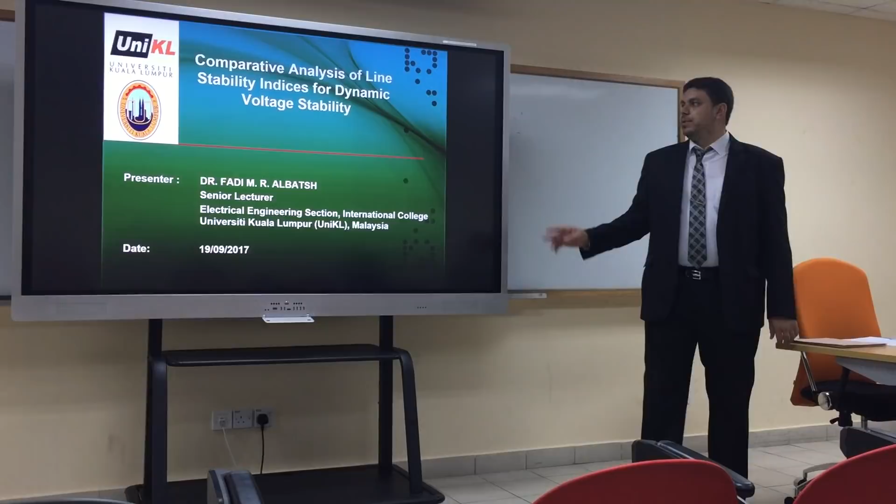Inshallah today I will present my paper titled Comparative Analysis of Line Stability Indexes for Dynamic Voltage Stability.

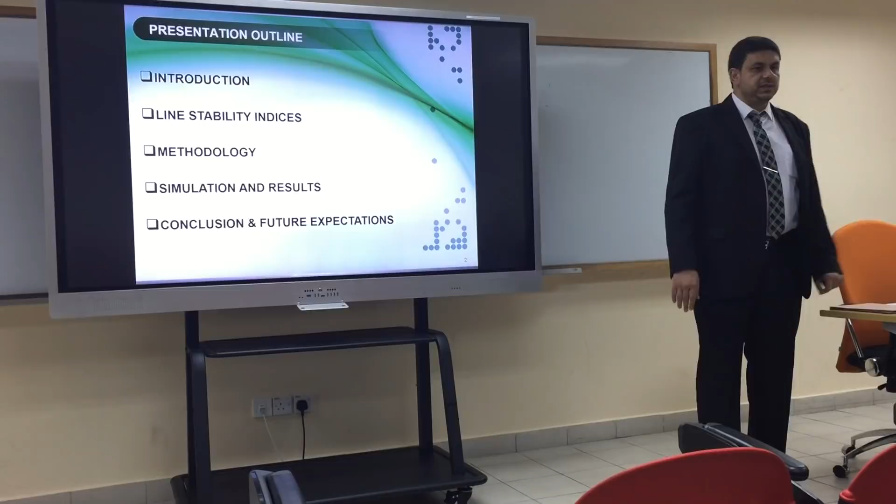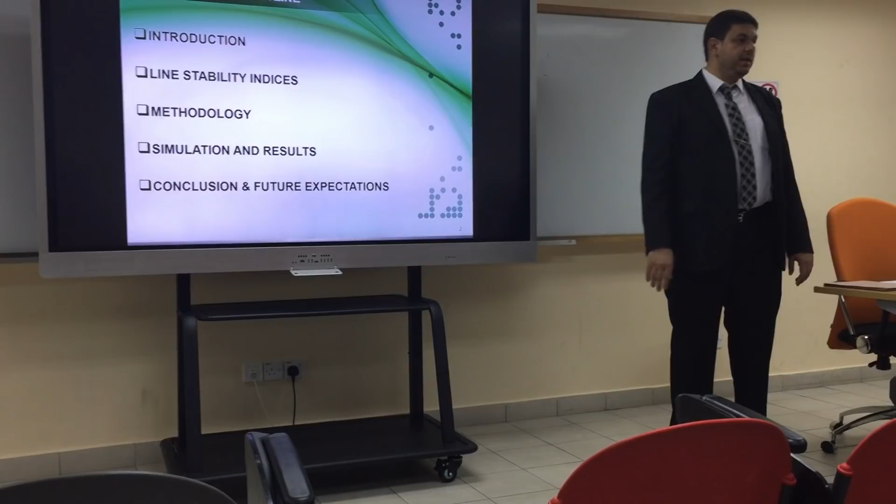The outline of my presentation: I will introduce first the problem of voltage instability, then introduce 4 line stability indexes, followed by the methodology used to analyze the voltage stability indexes based on dynamic analysis. Then I will show some simulation and results, and lastly conclusion and future works.

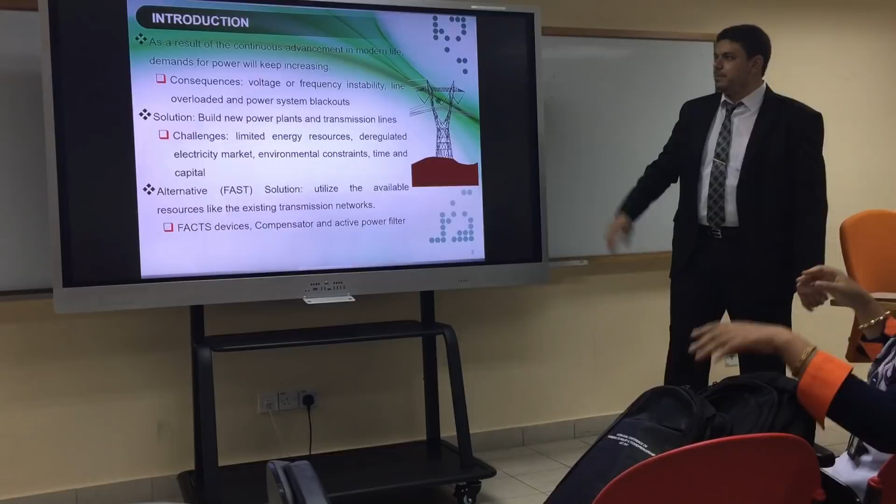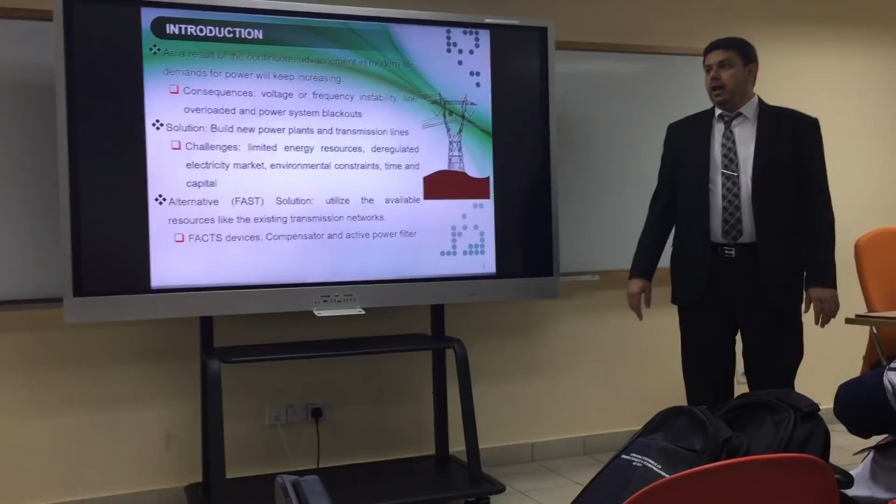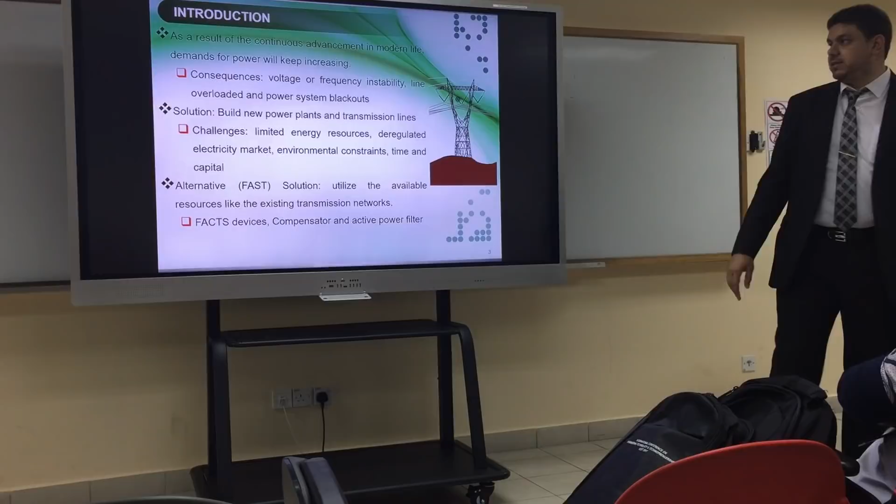As a result of the continuous advancement in our modern life, the power demand keeps increasing more and more. As a consequence of these increasing demands, power system networks suffer from different problems, such as voltage instability, frequency instability, line overload, and power system blackouts.

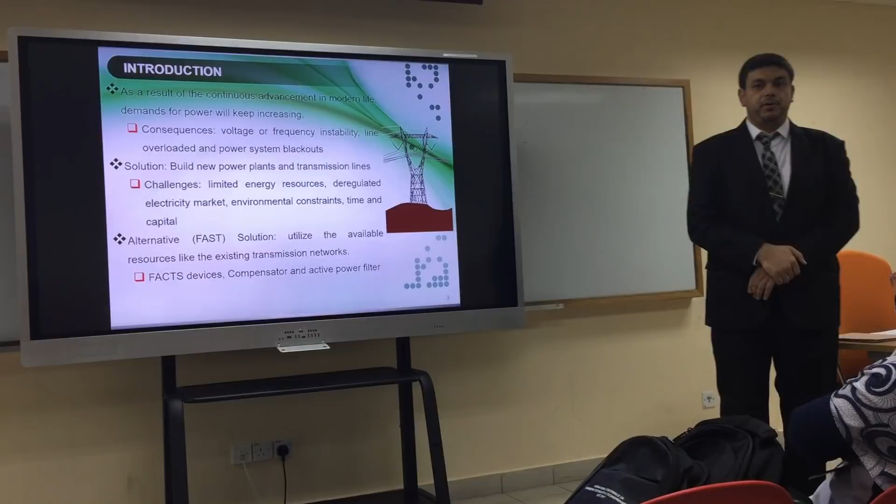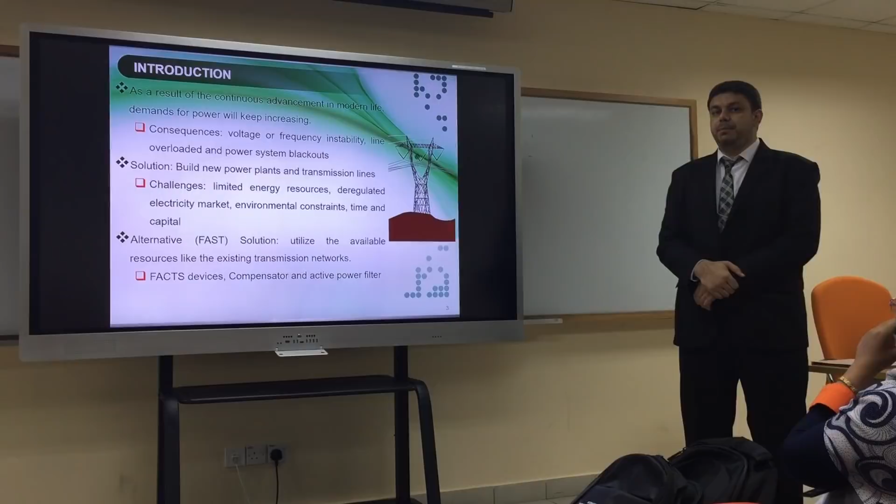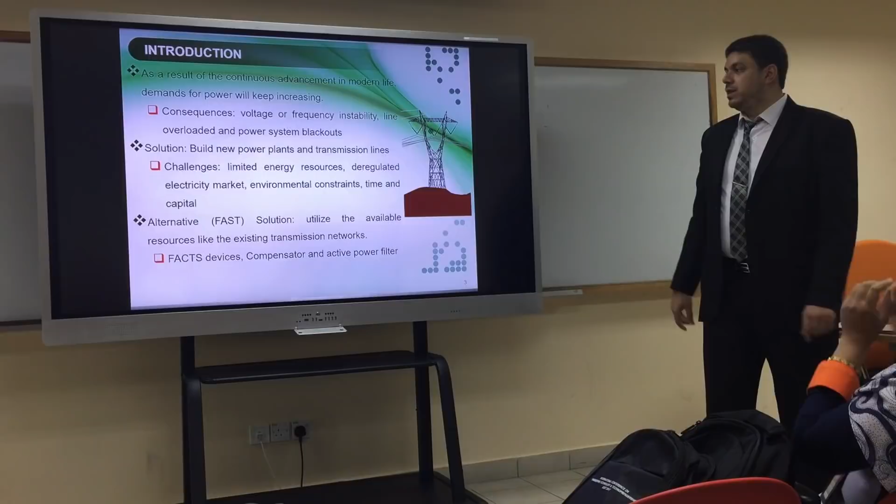To come out with a solution for these serious problems in the power system network, we actually have 2 solutions. The conventional solution is to build new power system plants and new transmission lines to supply the increasing electricity demands. However, this solution is very difficult to implement, because we have many challenges such as limited energy resources, deregulated electricity market, environmental constraints, and time and capital to implement such big projects.

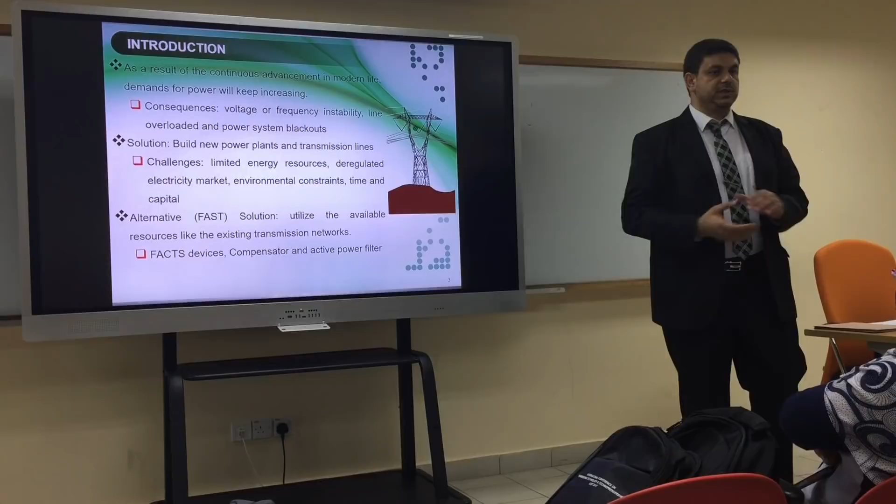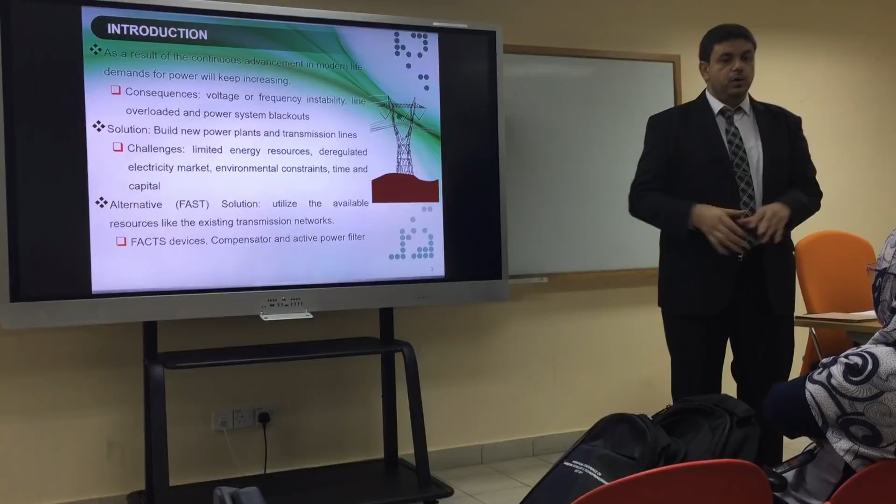The alternative solution is to enhance and improve the existing power system network by integrating some compensators or renewable energy resources with the existing network, to increase the capability of the current network and improve the power quality of the whole network.

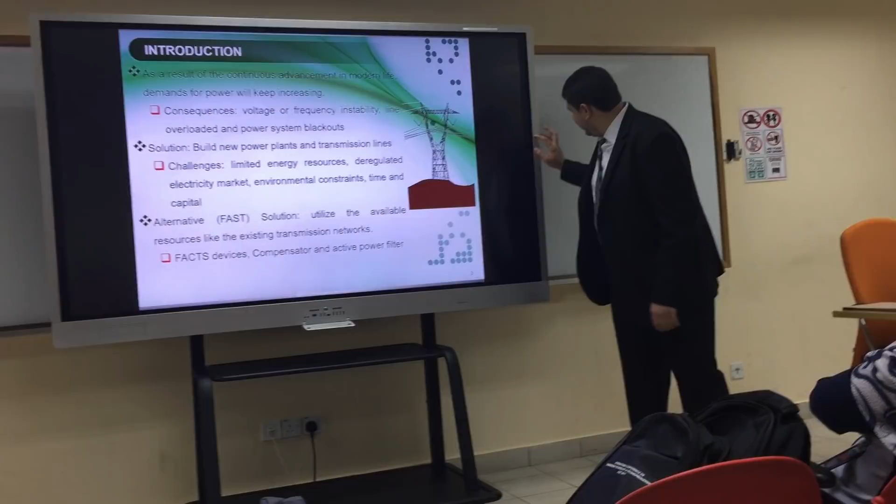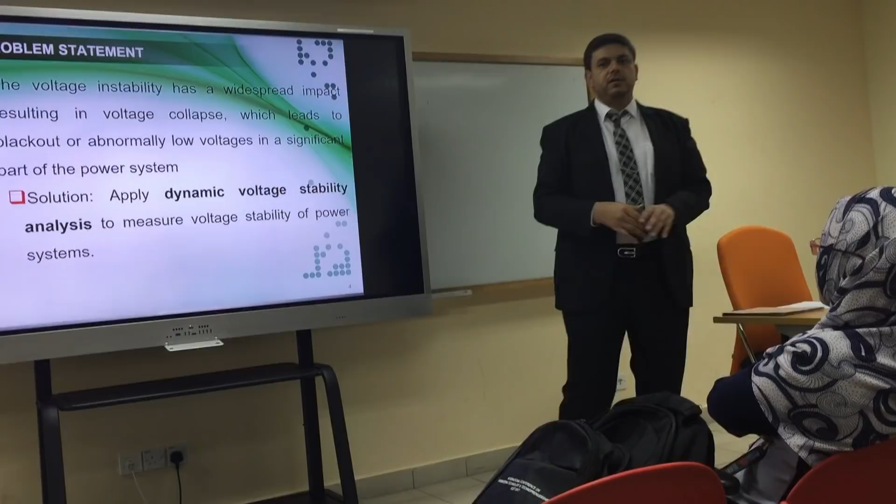To implement this solution, which I would call the intelligent solution, we actually have one problem: where should we support the current network? Let's say we have a large network, like for example a 118 bus large network, and we decide to use this solution and support this network. Now the critical question is, at which bus should I support this network? This is the main challenge we face.

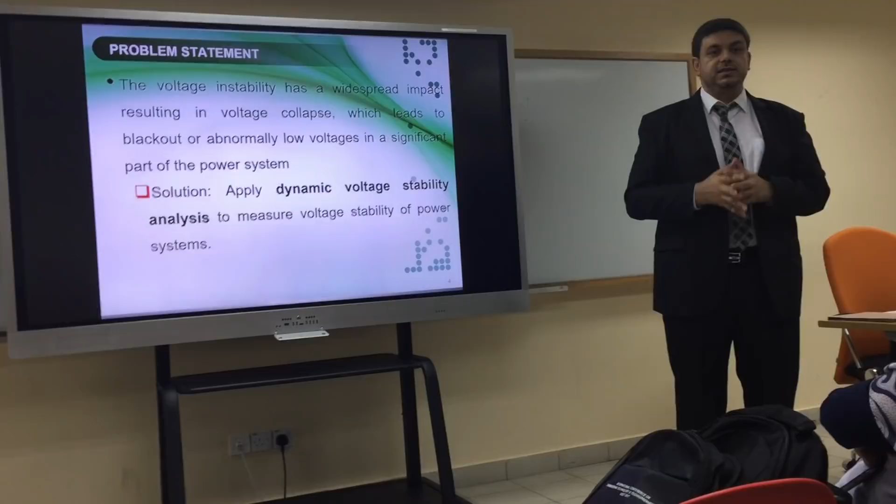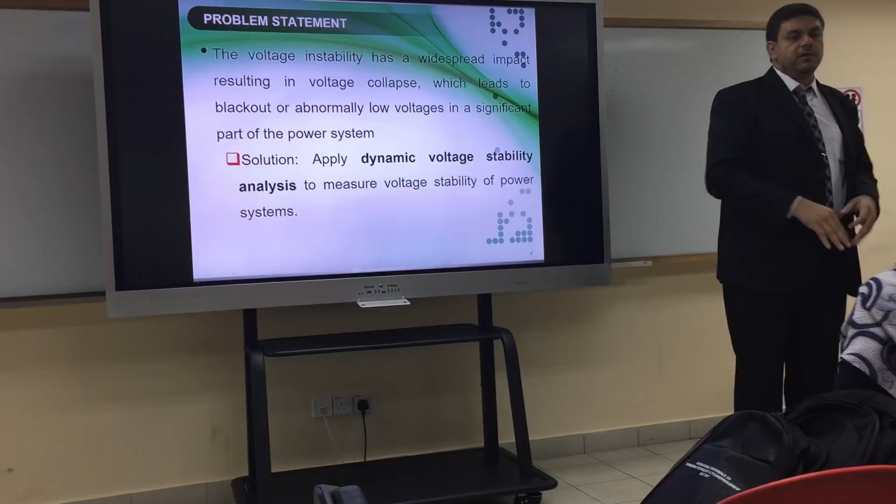The answer is, we're supposed to support the weakest buses in this large network. How can we find and determine the weakest buses? We have to use line stability indexes to do analysis for the whole network and find and determine the weakest buses along this large network. Then we can integrate our proposed solutions such as renewable energy, FACTS devices, compensation devices, active power filters, and so on.

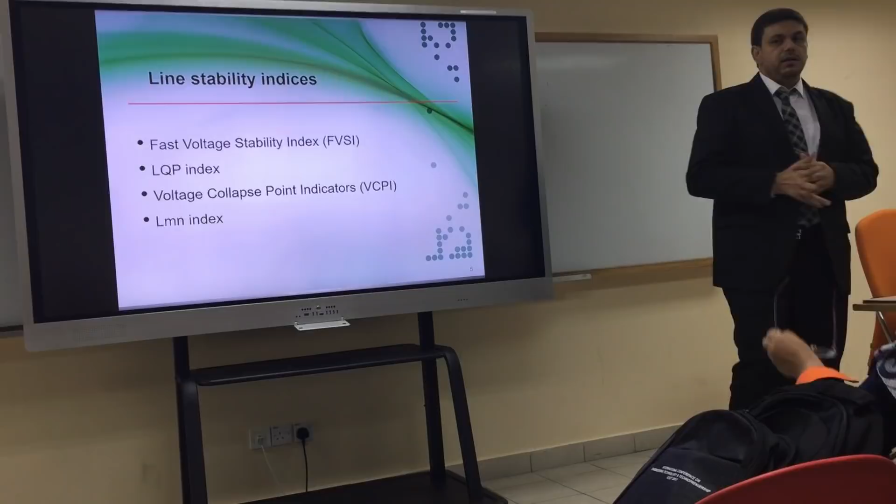Now I will introduce what line stability indexes are. Line stability indexes are used to do analysis for the whole network and find where the weakest buses are in terms of voltage instability.

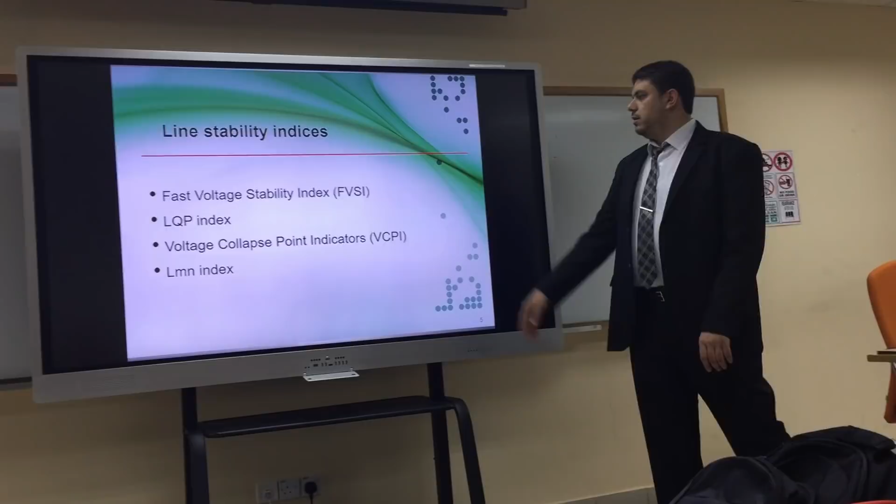We have different and many line stability indexes. In this paper, I have presented 4 of them: the well-known indexes, which are Fast Voltage Stability Index, LQP index, Voltage Collapse Point indicator, and the LMN index.

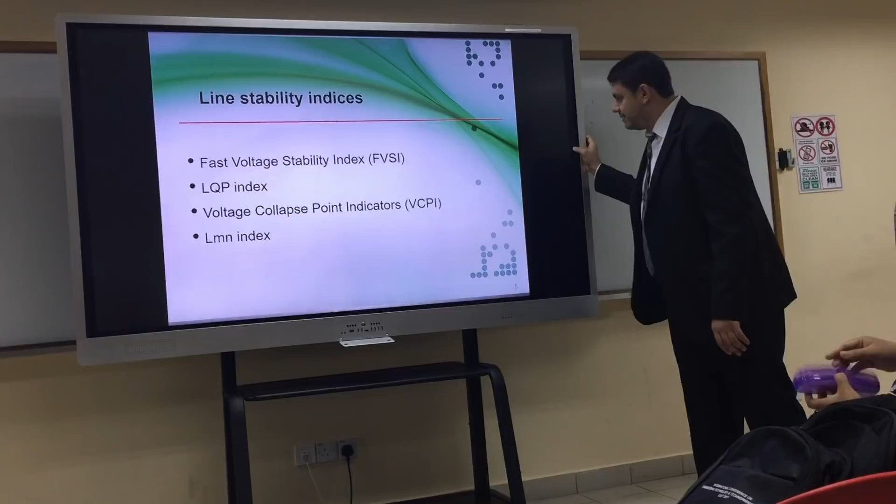So basically, how can we use those indexes? First, you have to build your network using dynamic simulation software, for example PSCAD or any other software. So you have to build the system.

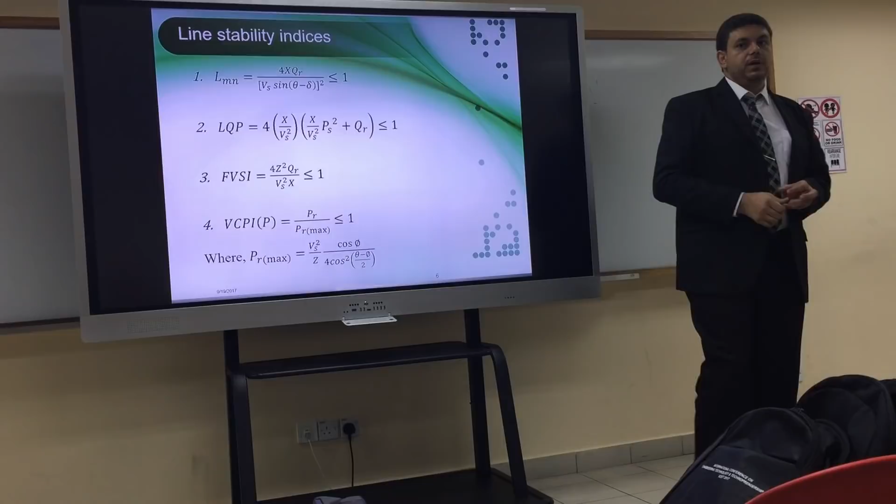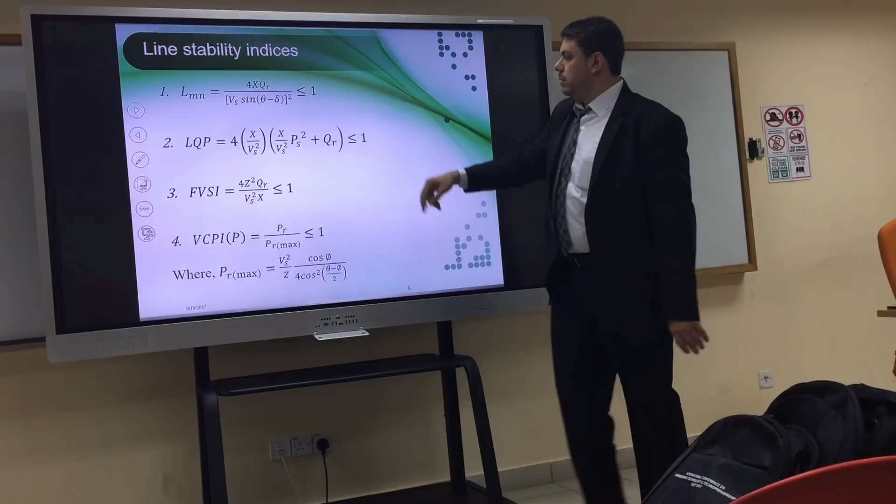Then analyze the whole network in terms of, at each bus, finding all the parameters such as VS, Q, P, theta, voltage, Z, and so on. This means we have to build the full network, and at each bus, measure and find all parameters of that bus.

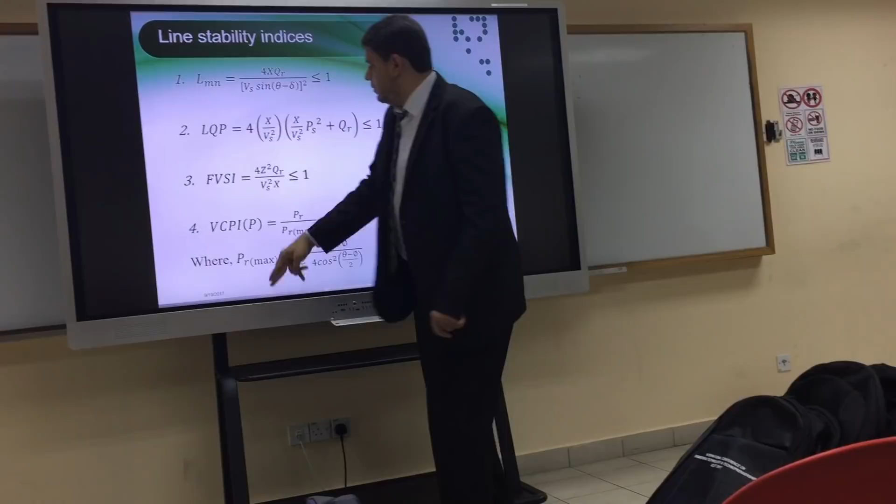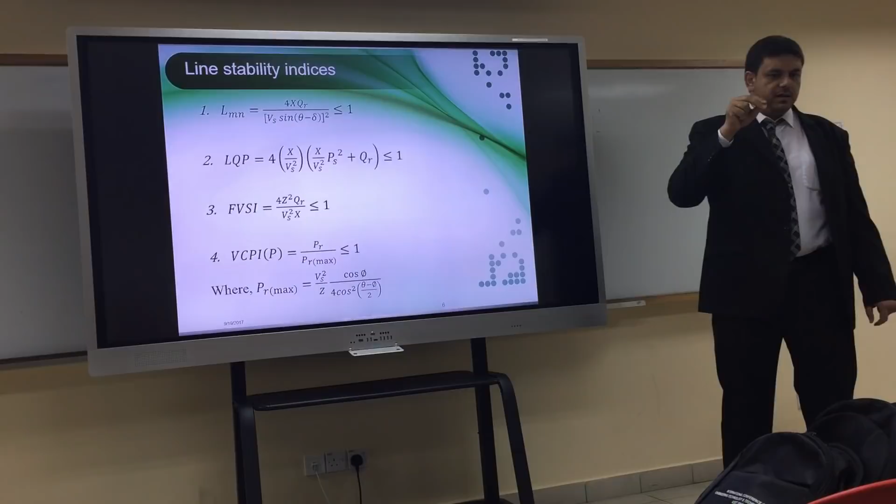Then, using these equations, for each bus, I have to find the values of all these indexes. This means I have done the analysis and have one Excel file. In that Excel file, I key in the values of all parameters: voltage, current, impedance, active power, reactive power, and so on. Then automatically I include this equation in Excel, and automatically we will find the value.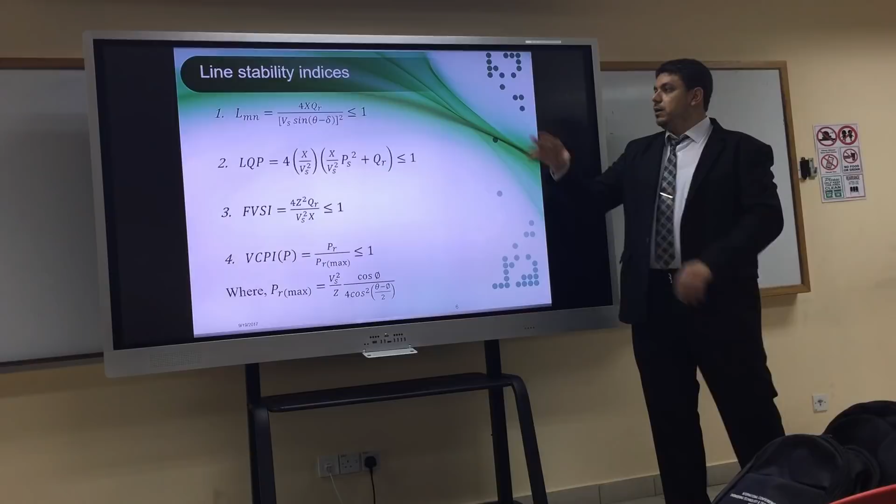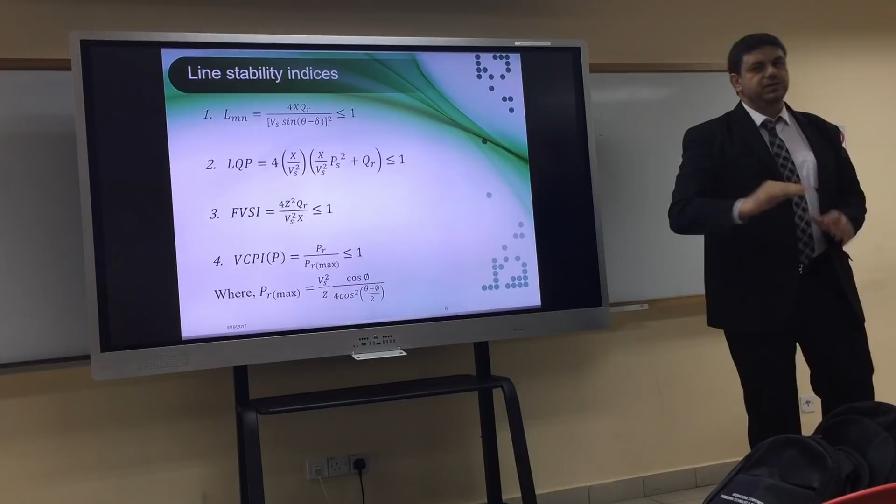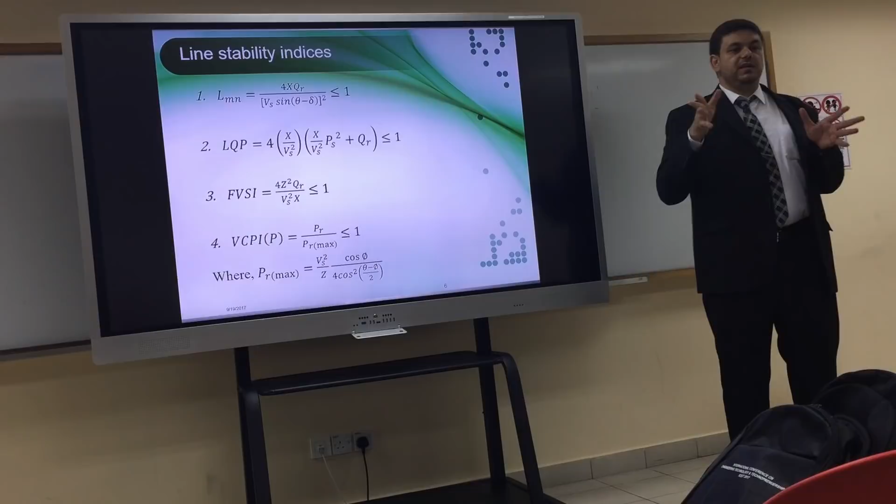Now, the value must be between 0 and 1. If the index value reaches 1, it means this bus reached instability condition. So this is how we use voltage stability indexes to find the weakest buses: we do full analysis, apply the equation, find the value of the index, then analyze the values. If the value reaches 1, it means this specific bus reached instability condition.

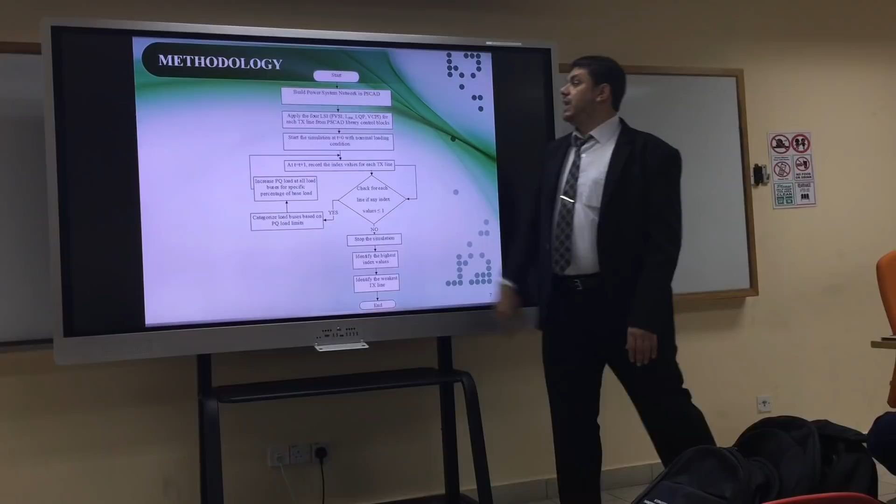So this is the methodology. We start by building the power system network in PSCAD. In my paper, I have used PSCAD. Then we apply 4 voltage stability indexes for each transmission line using PSCAD library control blocks, which have direct tools that can measure all parameters. Then we start simulation, and at each second...

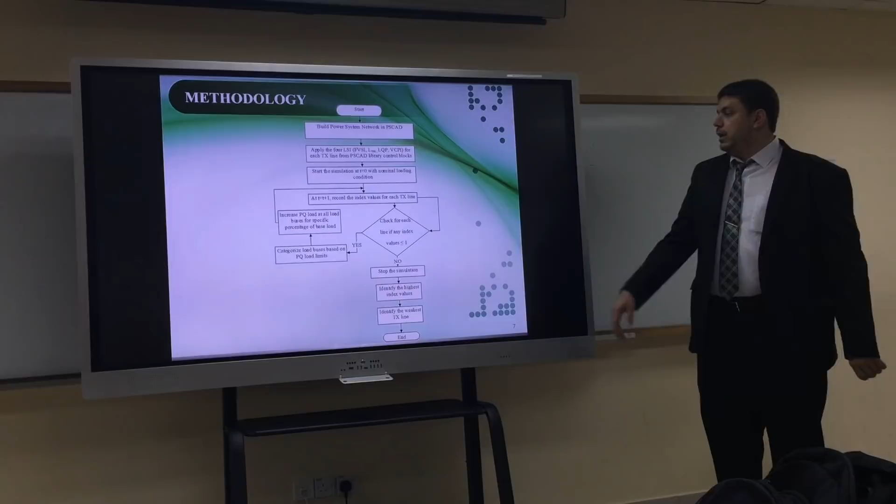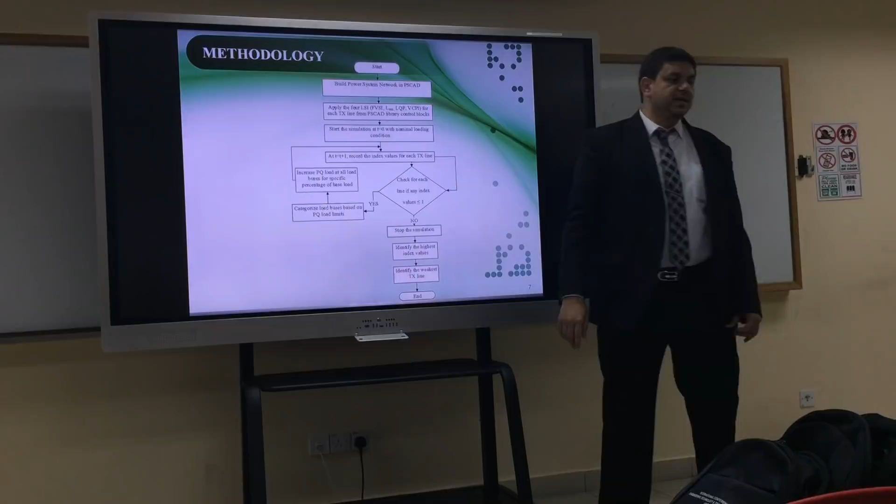I have to check if the index is less than or equal to 1 or not. If the index is less than 1, then I have to increase the PQ load, because I couldn't know where the weakest buses are if none of the indexes exceed the value 1. So in this case, you have to increase the PQ load for all buses.

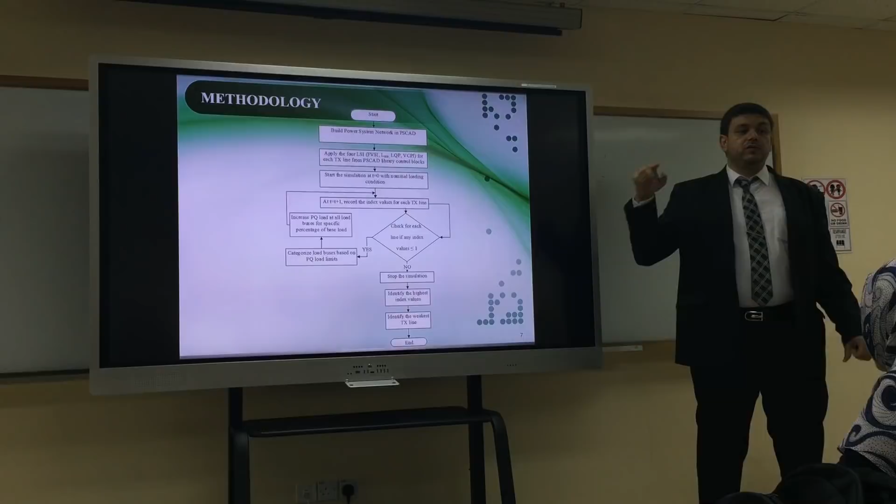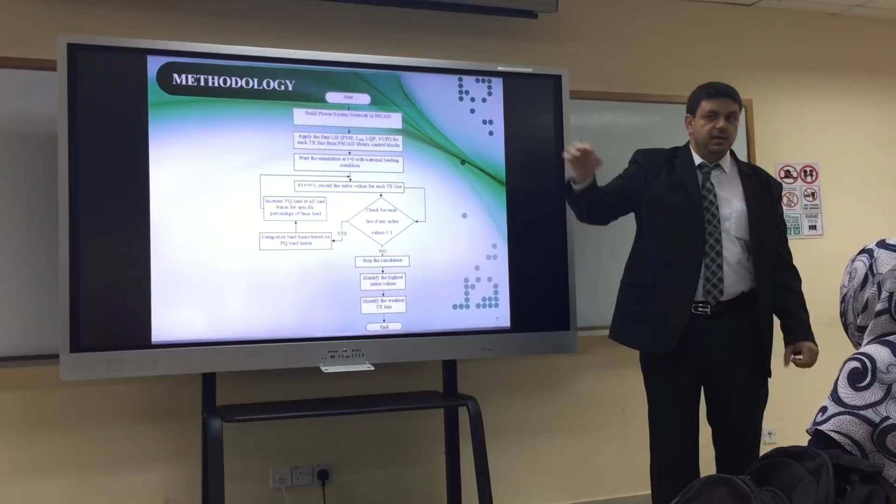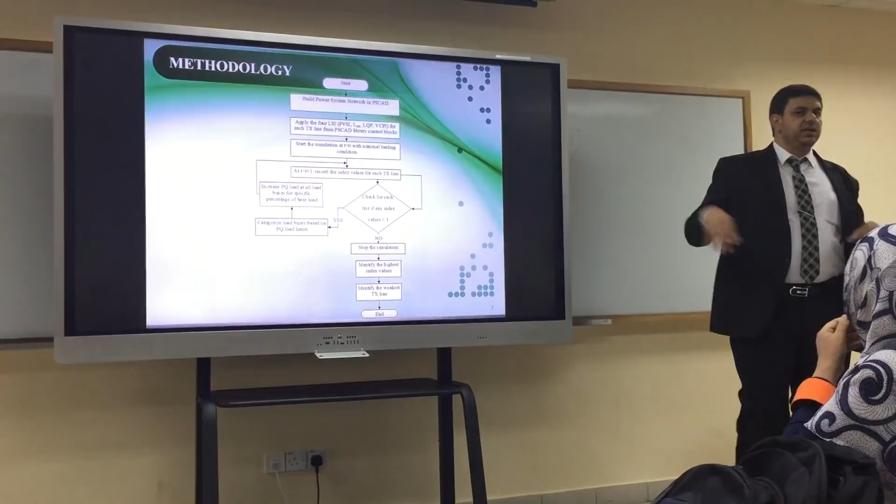Then you do the analysis again until one of the lines exceeds value 1. Then we know these are the weakest buses. If from the analysis the value reaches 1, stop the simulation, identify the highest index value, and this will be the weakest bus. This will be the procedure for all buses.

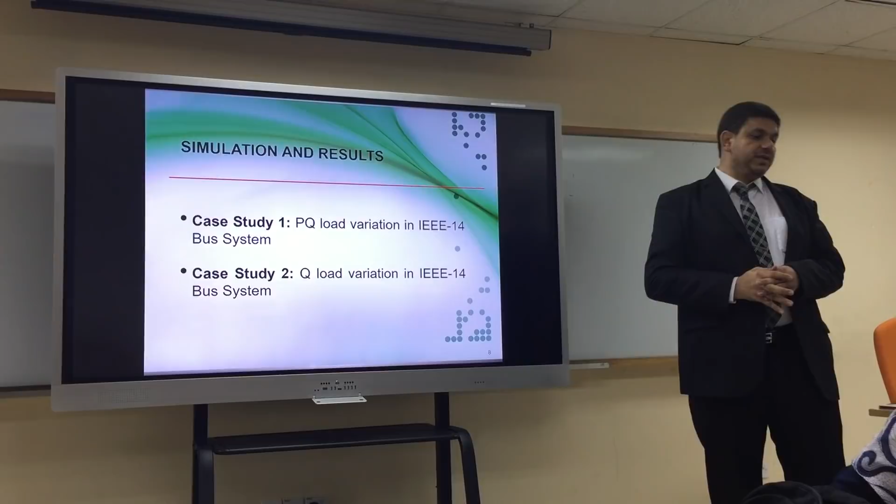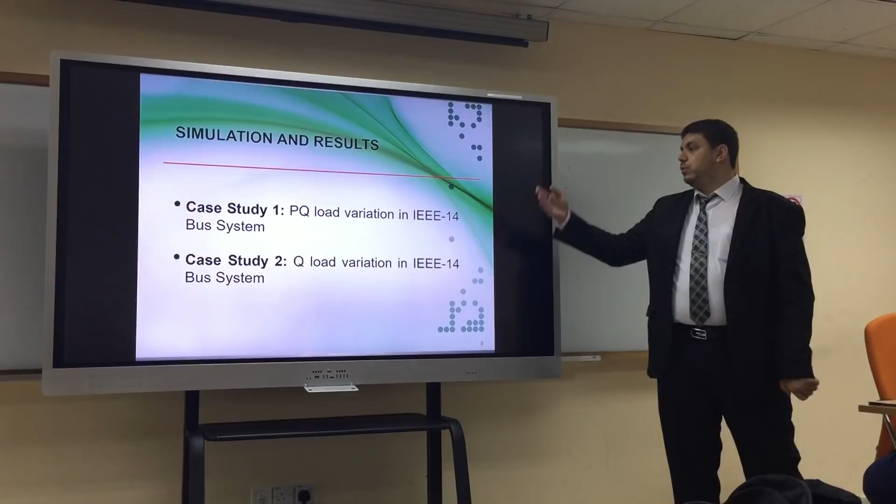In this paper, I have done 2 case studies: one by increasing PQ load, one by increasing Q load. Why did I implement these 2 case studies? Someone will ask me why use 2 different load categories.

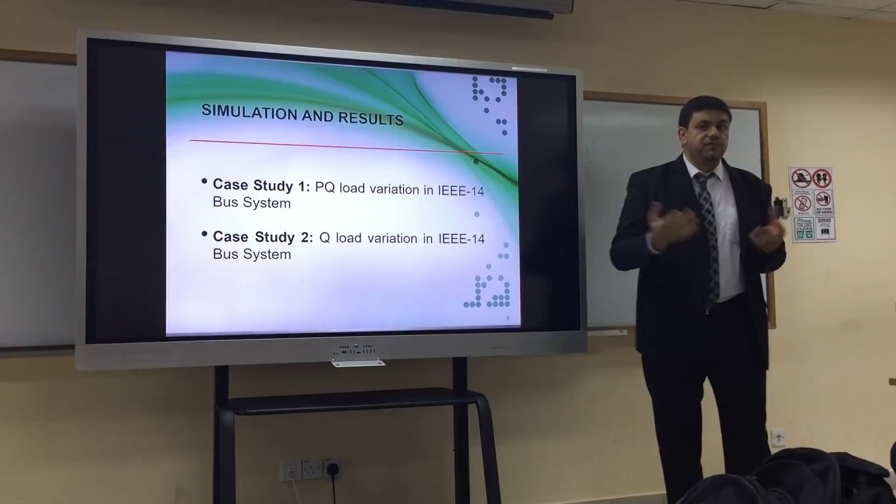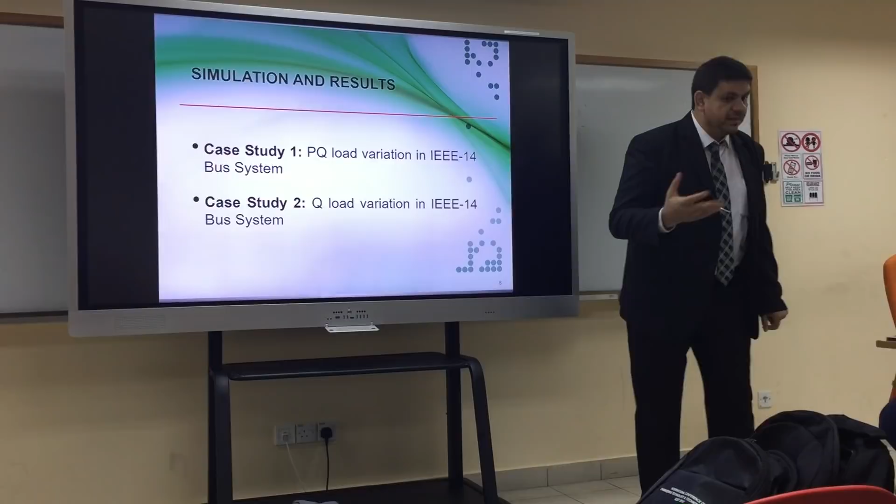The answer: to find the weakest buses, you have to increase the load, but the category or pattern of the load you decide based on the area. If we are in an industrial area, we know the Q is high, so we increase the Q load. If we are in a residential area, we know the pattern of the load is PQ load, P and Q almost balanced, so we increase PQ load.

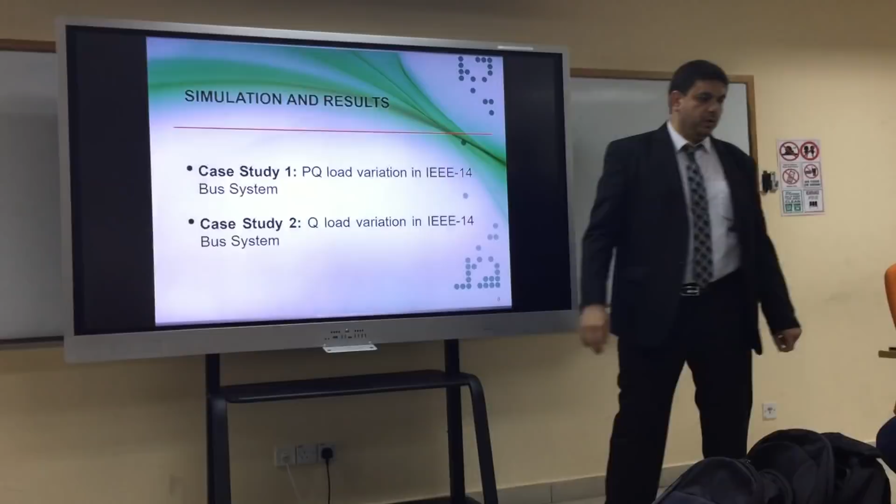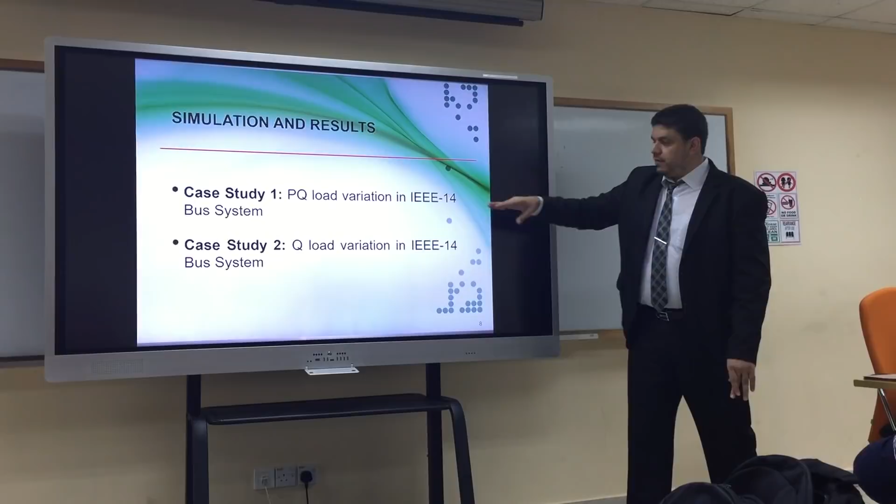You will see that the weakest buses in each case is different. However, it's in the closed area. So the analysis of this case study will come out with one line as the weakest bus, and this one will come out with another different line.

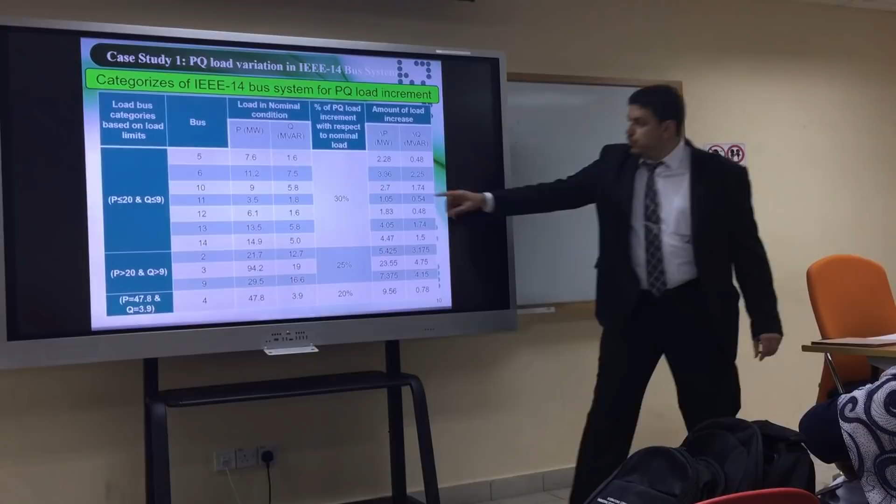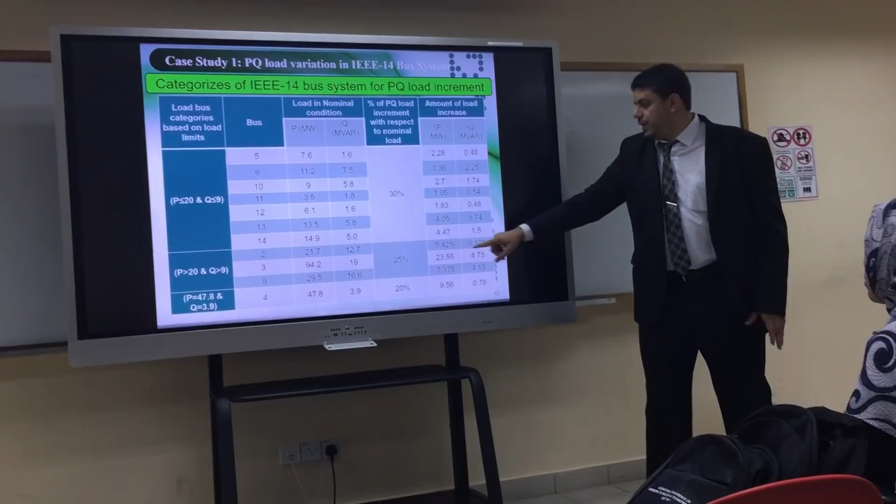In this first category, we increase the load by 30%. Why? Because these lines have the lowest load. If you look here, 7, 11, 9, 3, and so on. But for category number 2, where I increase 25%, the load is higher, 21, 94. That's why I cannot increase with the same percentage because it will be overloaded.

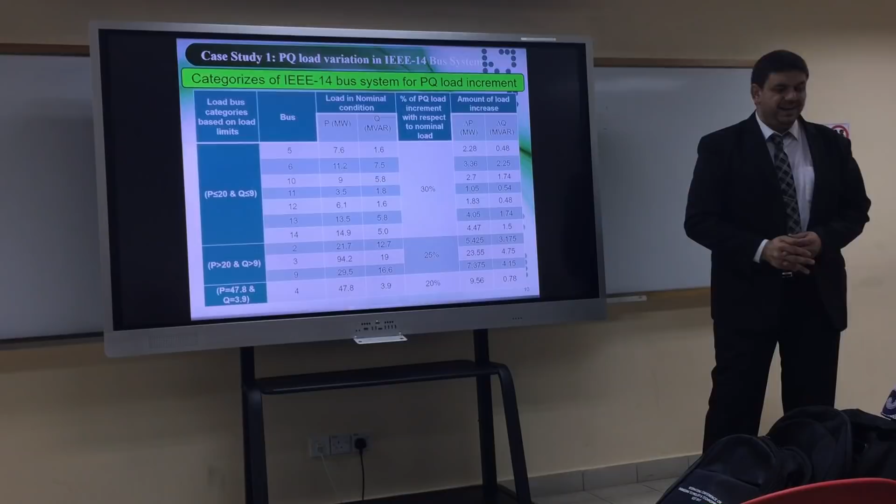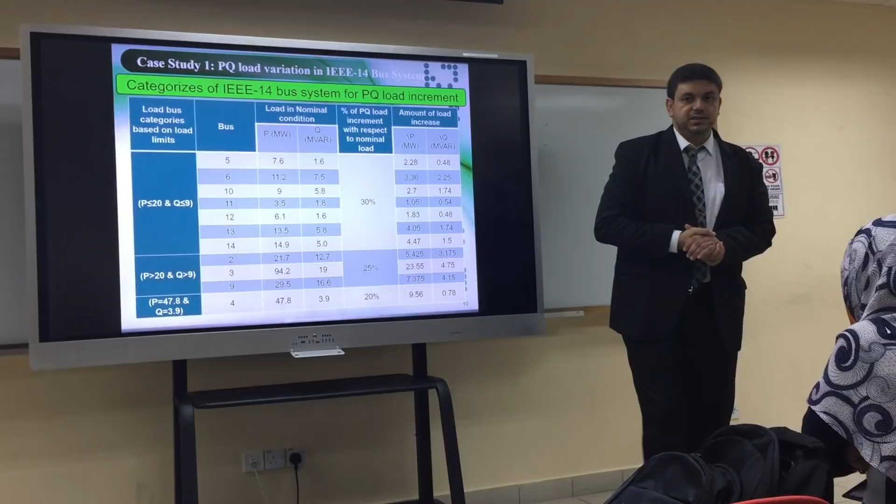So look, for example, here, the load is also very high, that's why we increase with a lower percentage. So it's not the same. We increase with different percentages based on the current load for all buses. After we increase, here we come up with the new amount, then we will do analysis for the voltage stability indexes.

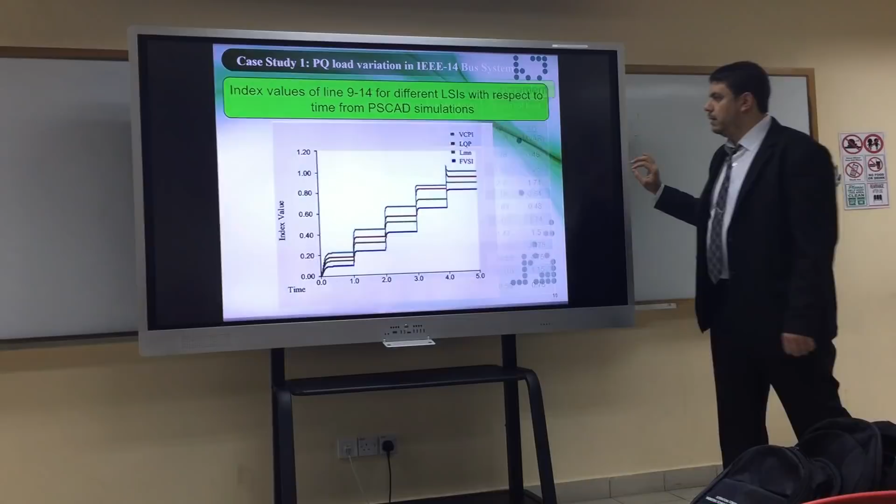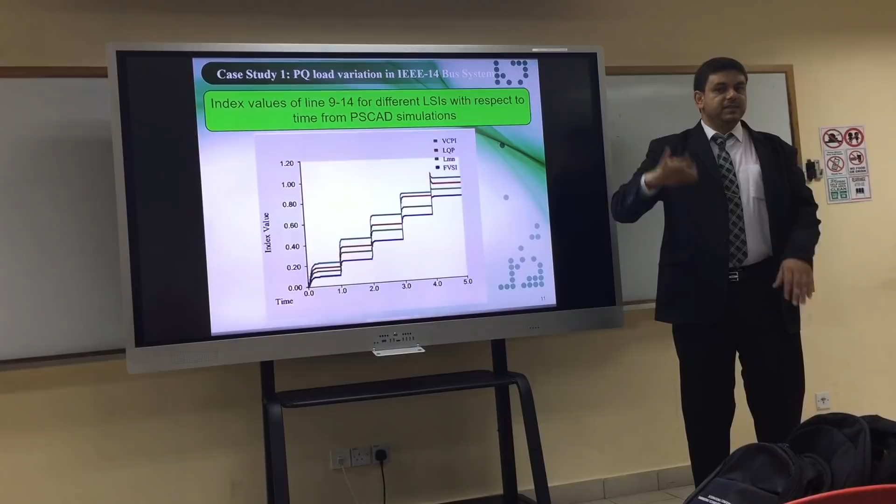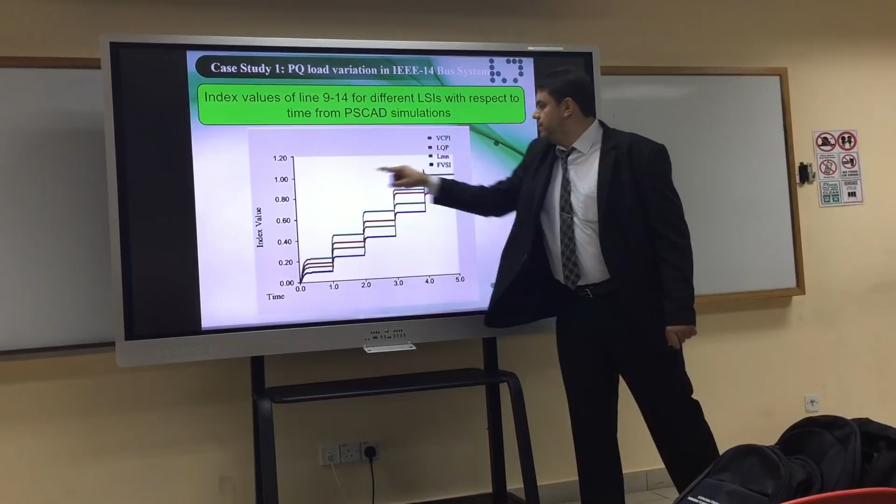Now, I have increased the load how many times? 5 times. At the first increment, the indexes still reach only 0.2, still none of them exceed 1. So you have to increase again with the same percentage. Increase again, 0.6, again 0.8. Then at the 5th increment, one of the indexes actually reached number 1.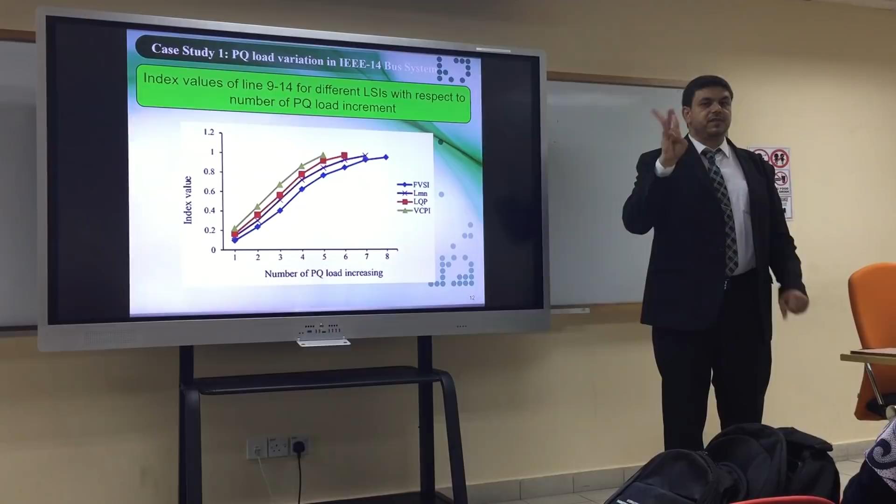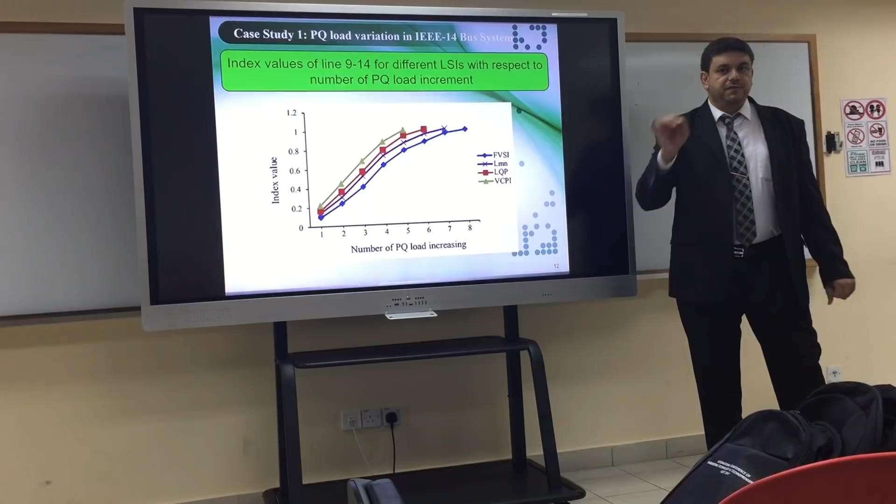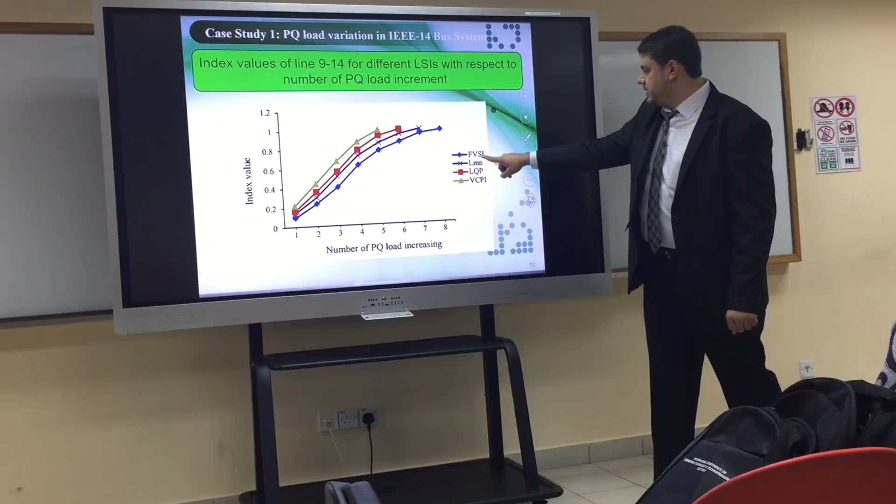This is very important as a comparison between all these indexes. We know that the response of all these indexes is not similar. So for us, the important thing is to find the fastest index that will detect the weakest bus early. If you look here, we found that this index, VCPI, can detect the weakest buses very early compared to other indexes.

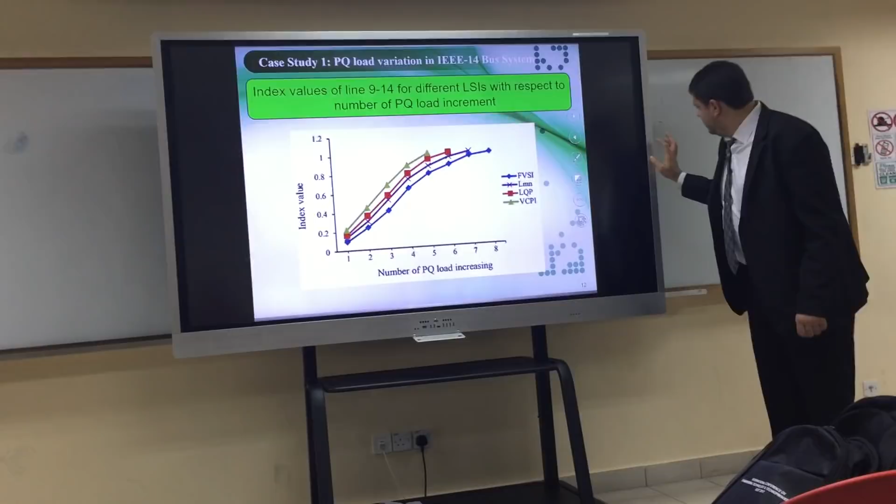After the increment, we do the full analysis. We found that the critical bus, based on the index values, is line 9-14.

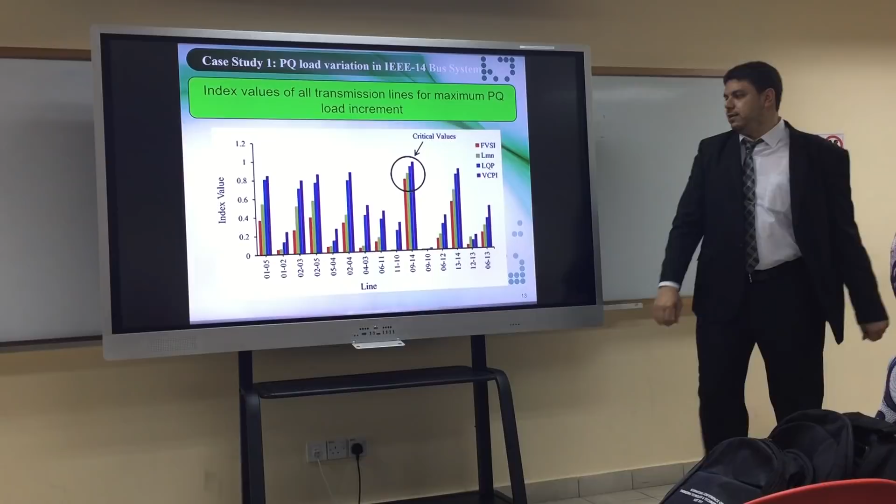Now this is the second case study, increasing Q. Same thing, I will not go through it deeply. We categorize different percentages, increase till here, we increase till 5 steps. Same analysis, we found VCPI is the fastest, all right.

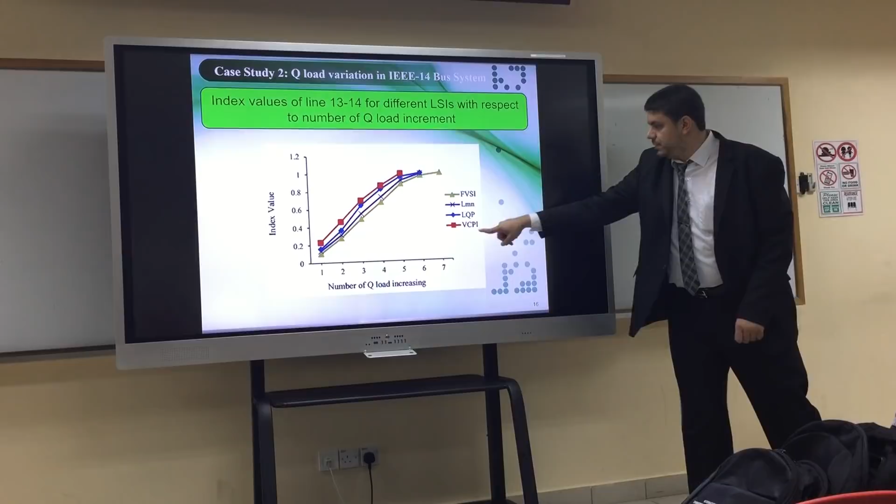And then we found that the critical bus in this case study is line 13-14.

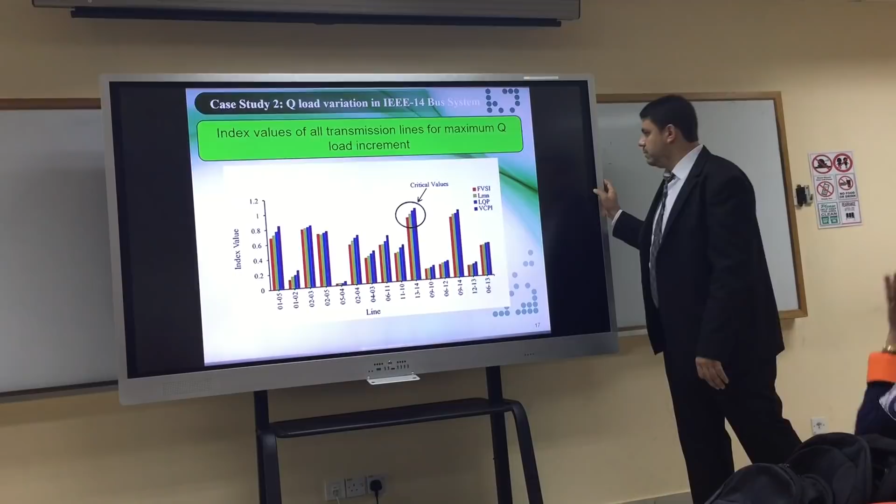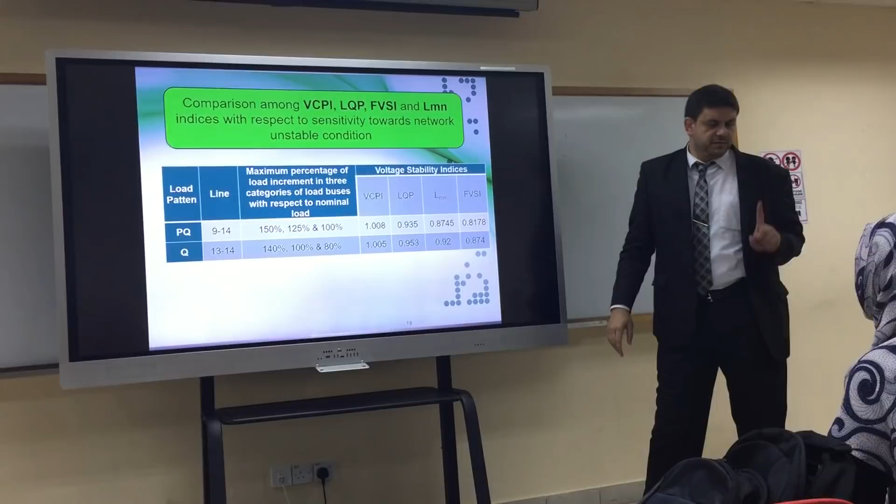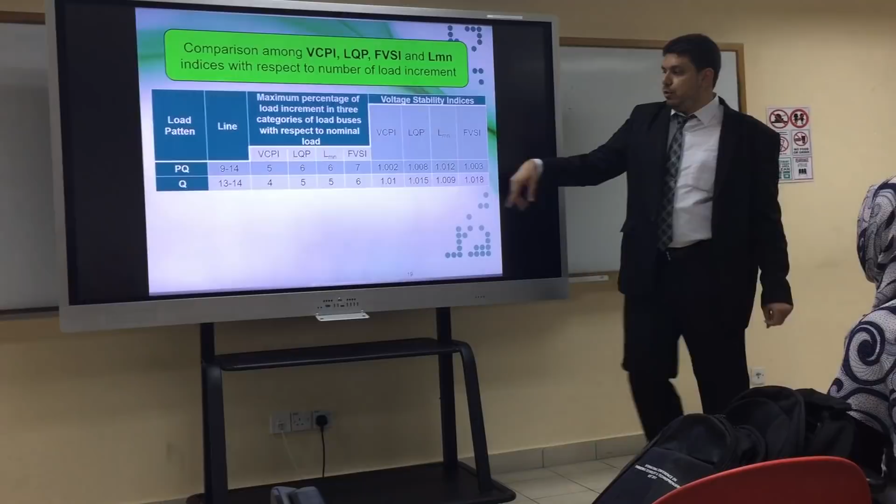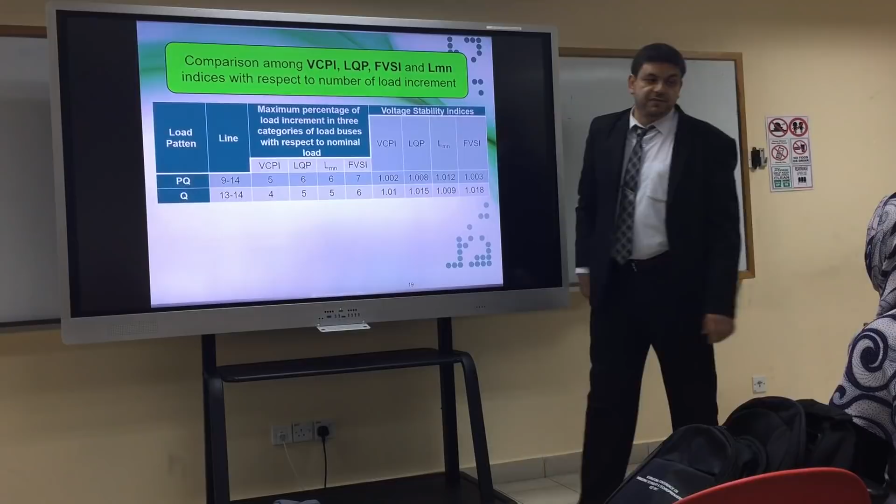So we found that VCPI reached the first one after almost 150% increment. And here we found that we need only 5 steps in PQ load and 4 steps in Q load to detect the weakest buses, compared to other indexes which require sometimes 6, sometimes 7 steps. Here we found that VCPI is actually the best in terms of performance.

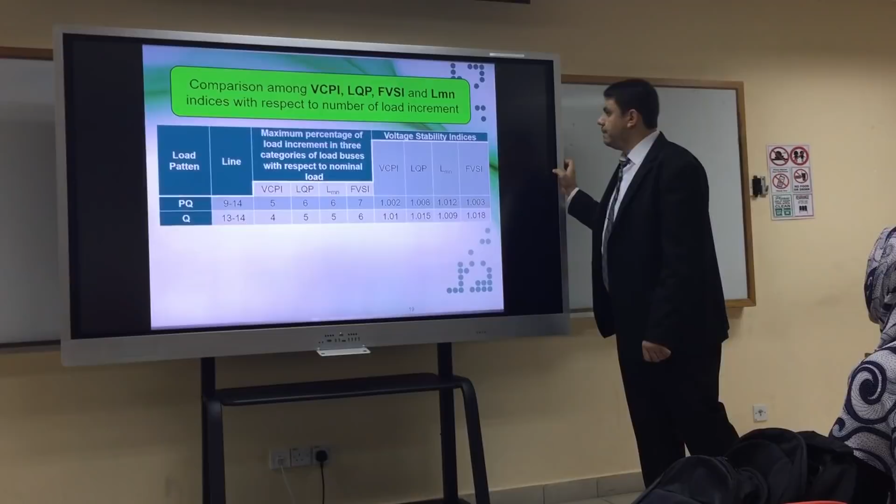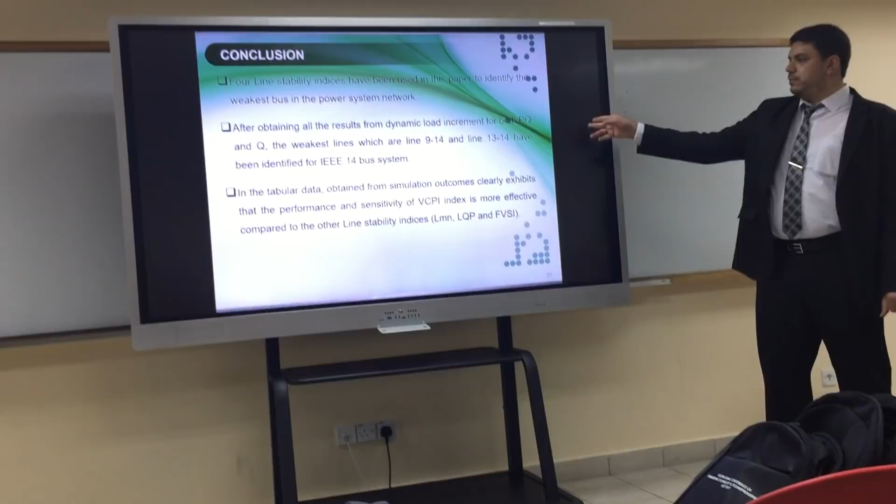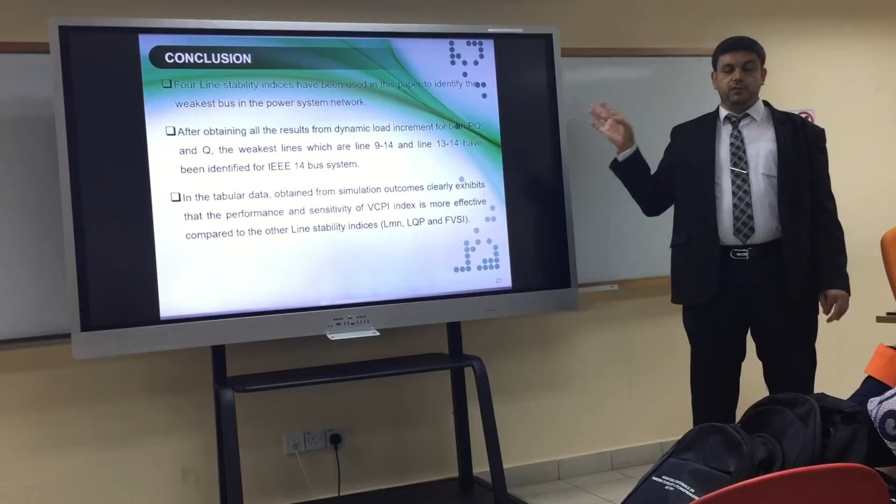And this is finally the conclusion. We can find that clearly, using the dynamic load increment for PQ and Q, we can find the weakest buses, and they are different based on the load pattern. From the results obtained from the simulation, we found that the VCPI index is more effective compared to other stability indexes.

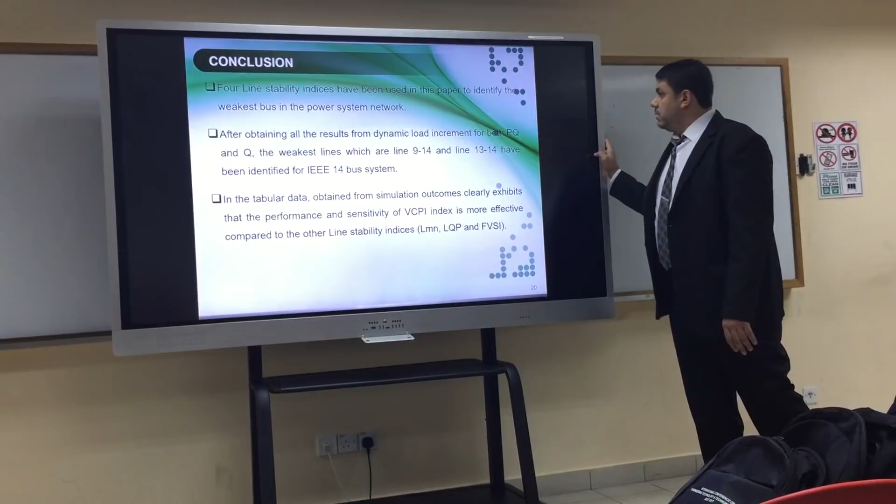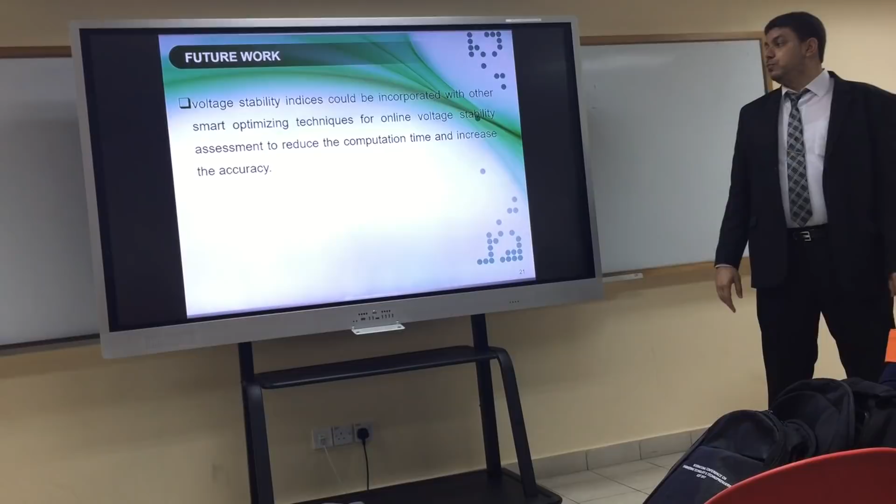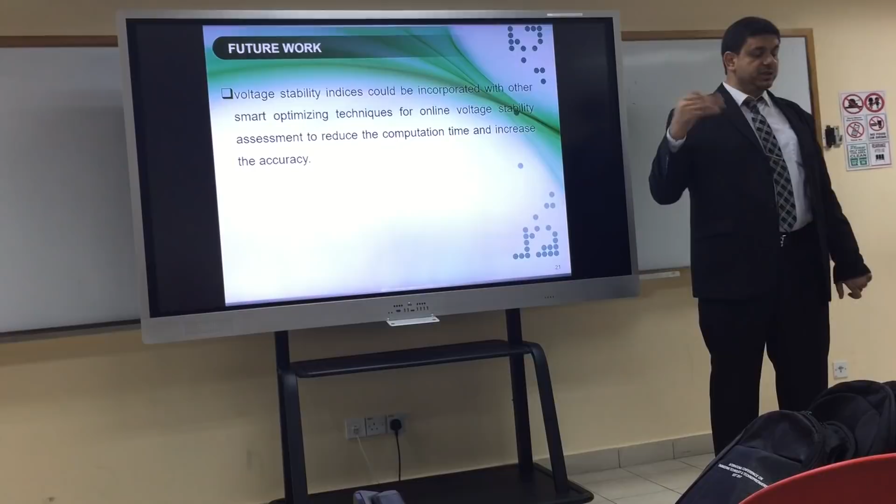For future work, voltage stability indexes could be incorporated with other smart optimization techniques for online voltage stability assessment to reduce computational time and increase the accuracy. As future work, we need to apply some optimization techniques in order to reduce the computational time, which is very high, and to increase the accuracy of the measurement.